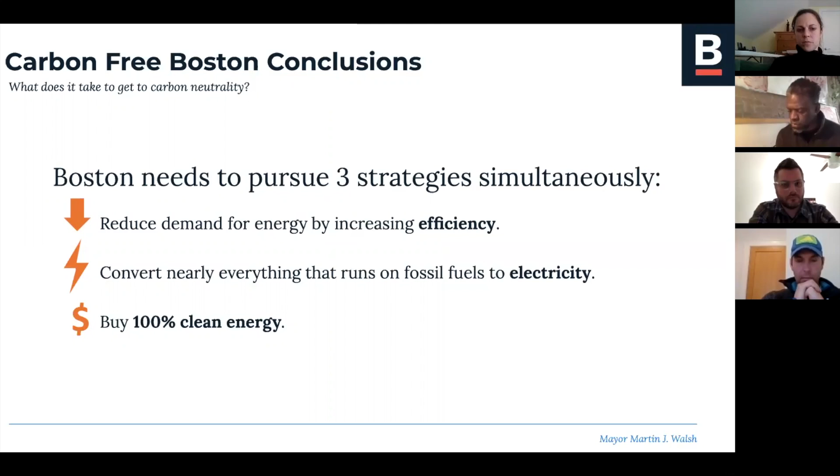And with that, they felt that any new building that's not net zero will be a building that will have to retrofit in the future.

So through the leadership of Chief and Director Sheila Dillon, we've been working with Placetailor and Thornton Tomasetti to study zero emissions in the buildings that we fund, and those are generally the typologies.

We have a diverse range of typologies we look at at DND. They're not all large buildings. They range from 1 to 2 family all the way up to multifamily buildings.

So we wanted to study best practices, outline optimal strategies, and then this work would lead to a set of requirements, guidelines for zero emitting buildings, or at least zero emitting ready buildings.

We did get some feedback from people recently that was very helpful. One clarification I wanted to make is we did ask the consultants to look at electricity as a fuel source based on the recommendations of our Energy and Environment Department and the Green Ribbon Commission. We know there are challenges to that for certain building types, but that was the goal of the study, just study one fuel type.

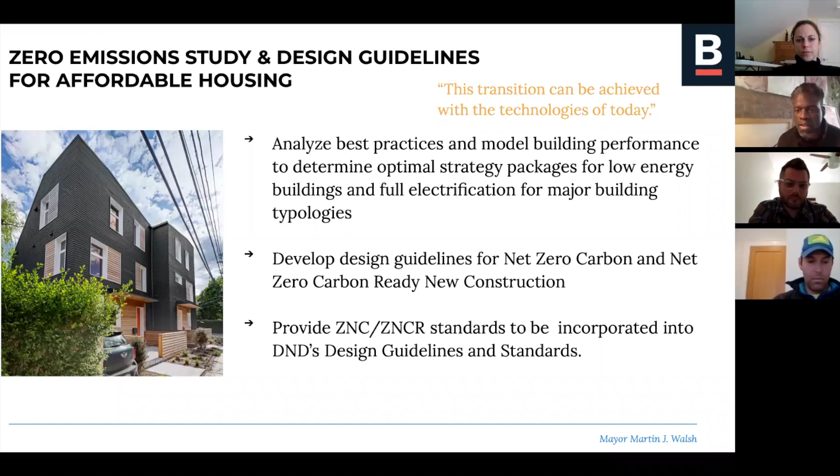Sure, and based on some feedback from the last stakeholder meeting, I think I talked too much, so I'm going to expedite this section. I'll review the methodology briefly. Feel free to ask questions, but I'll try to hit some highlights.

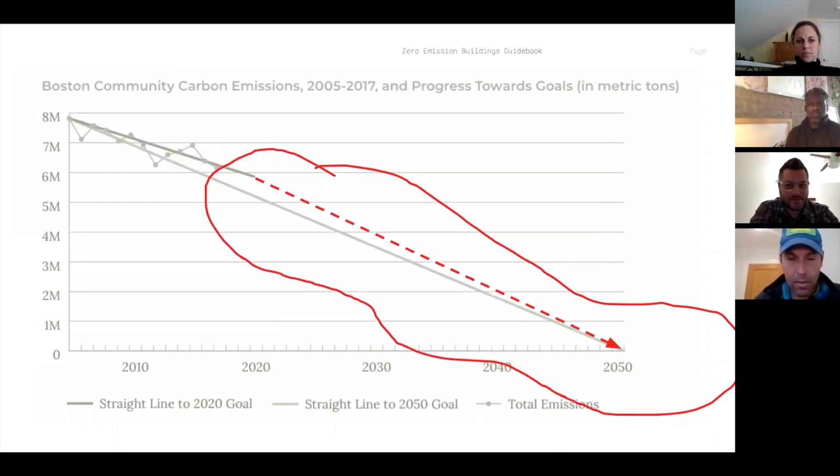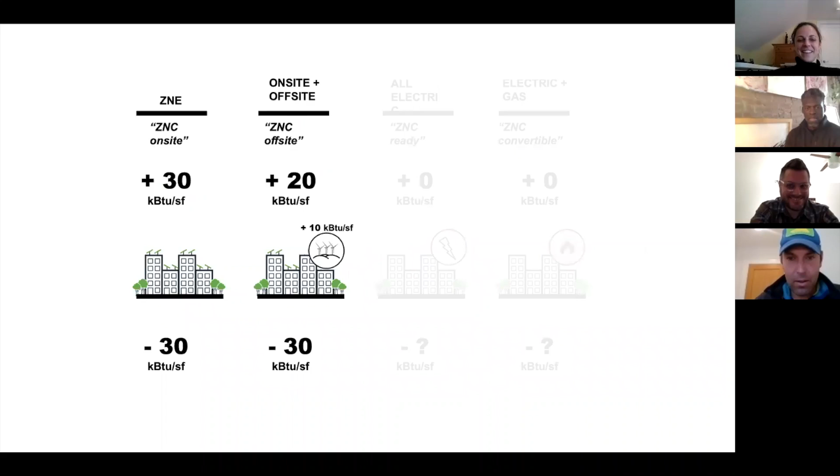Travis, can you skip forward a bunch of slides? Maybe I'll tell you when to stop. Keep going, keep going... almost there... a little further... okay, I hit a lot of stuff that's less critical. Yeah, we can start there. That's good, okay.

So what we originally set out to do with this project was figure out standards for zero carbon buildings. We started by looking at four individual building typologies, real buildings, actual energy models used on real projects. We asked: if you stuck a bunch of PV on these, could they be zero carbon? We concluded quickly that little buildings would provide an excess of clean energy, and tall buildings just couldn't get there.

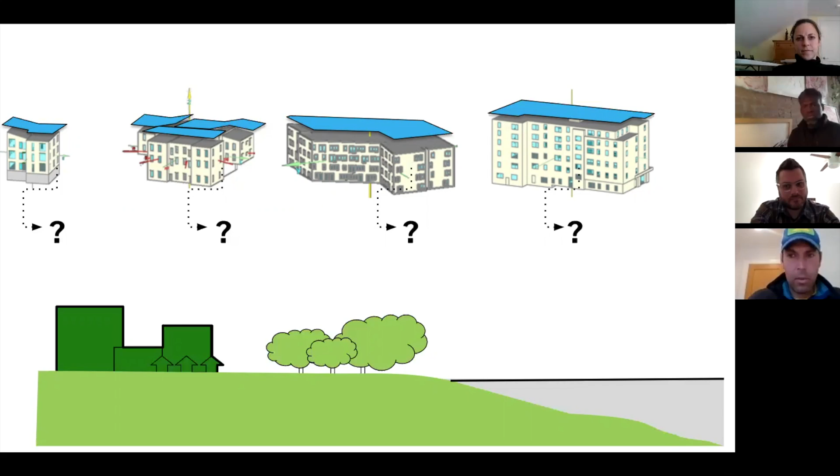Buildings in the middle, as you got bigger, the requirements became more and more stringent. This basically sums it up: if you have the same building with the same roof area, as you get taller and taller, you just can't hit zero carbon anymore.

So the result of trying to do this across different typologies is you put really intense standards on bigger buildings. The bigger the building, the more you need to drop the energy demand per square foot, which just isn't fair. It disincentivizes urbanization, it disincentivizes density. It's not an equitable approach.

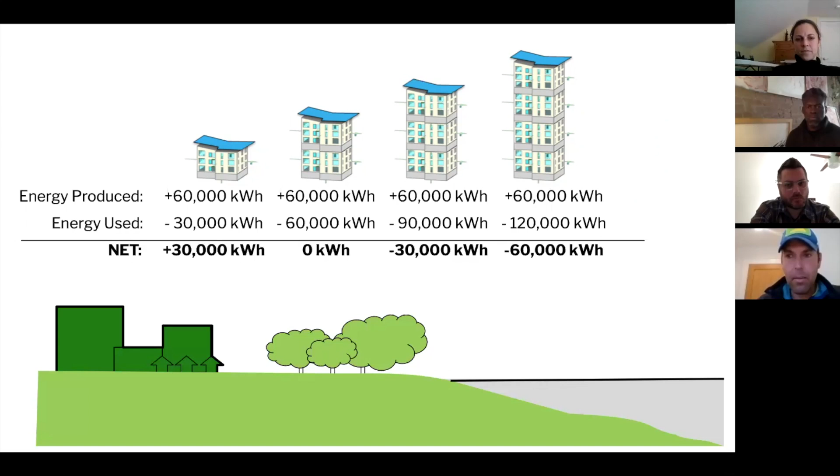So if you go to the next slide, yeah, that sums it up. Next slide.

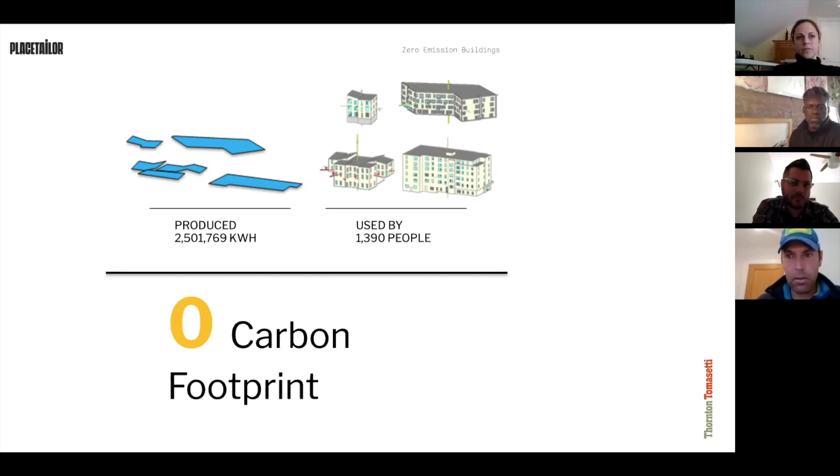What we came to was a per person metric. We took all of DND's upcoming portfolio and said, if there's a certain amount of renewables on all these rooftops, they could generate this many kilowatt hours. That becomes the budget to hit zero carbon across the portfolio. Now, if you take all the people that are going to live in those buildings and divide the total produced by the total amount of people, you have a budget of kilowatt hours per person, or in carbon terms, a carbon budget per person.

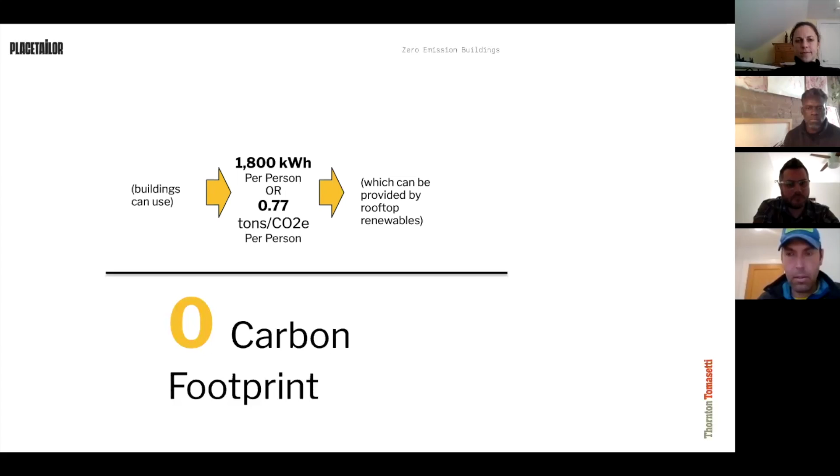Next slide. And so that's where we ended up: this idea of 0.77 tons of CO2 equivalent per person. This lines up almost identically with Passive House's carbon emissions targets. Passive House actually made the same decision of going to a per person metric so as to not disincentivize density. Next slide, there's the stuff from Passive House and the DOE study.

Next slide. But the question is, how do you get there? We set this standard of 0.77 tons of CO2 equivalent per person. How do you get there with each building? Next slide.

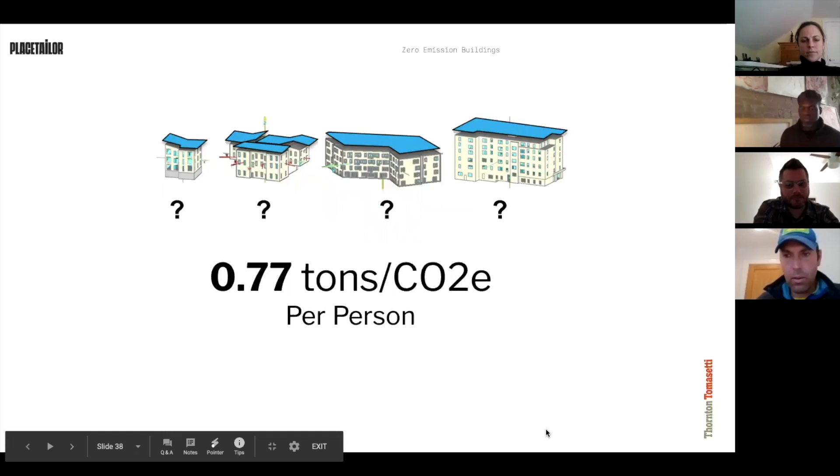So what we did was kind of a hack. We used four WUFI Passive models. Collectively we have a fair amount of Passive House experience, and we hacked into these models to get them each to run a ton of different wall U-values, window U-values, solar heat gain coefficients, all this stuff. That's what you see on the screen there.

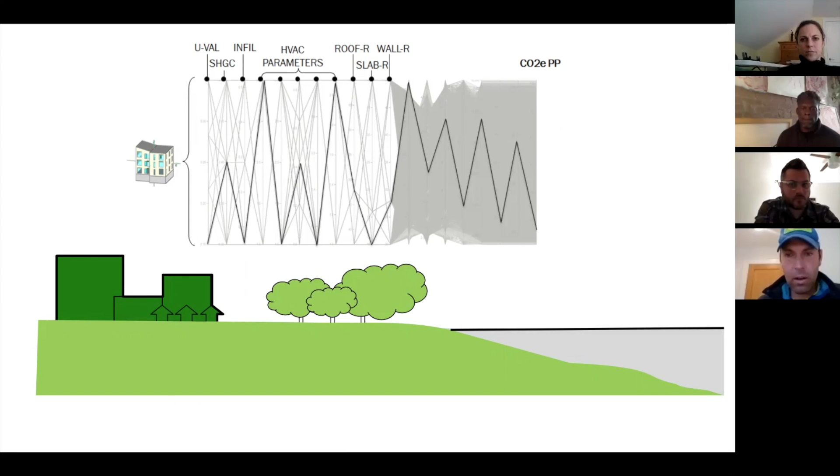Each one of those topologies gets about 80,000 simulations. So with those 80,000 simulations moving from left to right, you see all these inputs. It looks like a whole mess, but each one is a series of strings that goes from left to right, and ultimately, based on each combination, you get a CO2 footprint per person.

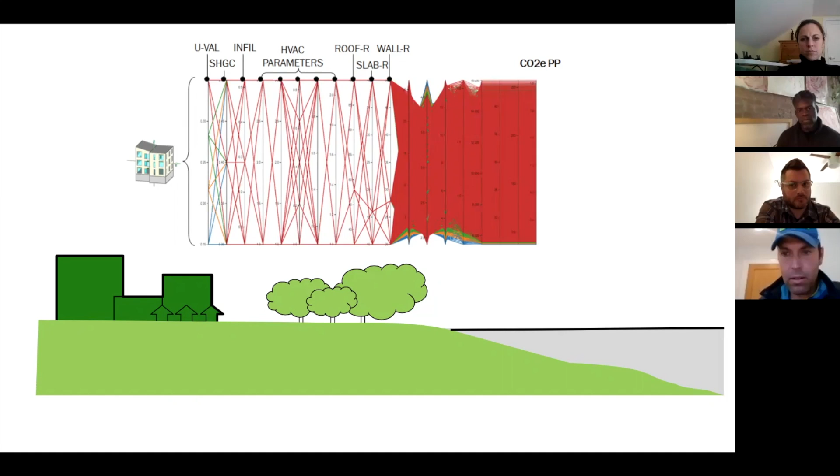Next slide. So what we did was take that bar and slide it down. We said, give me all the combinations that can hit 0.77 tons of CO2 per person. That gave us a formula of windows and walls and whatnot for each of those building topologies.

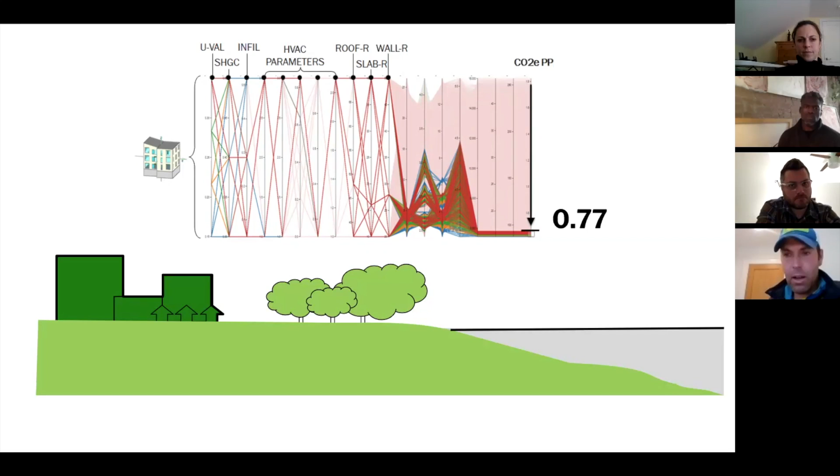And then Travis, who has a lot of building experience at Placetailor, figured out how to do it most cost efficiently, and we selected the most cost efficient recipes from those. Next slide.

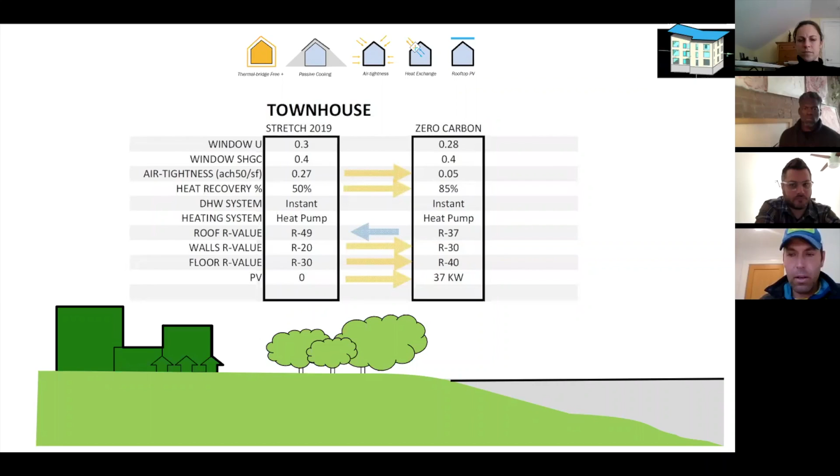And that's effectively what we've come up with in this study: prescriptive recipes for how to hit 0.77 tons of CO2 per person in these buildings, for different sizes, based on the most cost-effective way to do it. I'll let Travis get into that, but the idea is that it's a cost-neutral exercise. To quote my father on this one, the intention here is that this is an evolution, not a revolution.

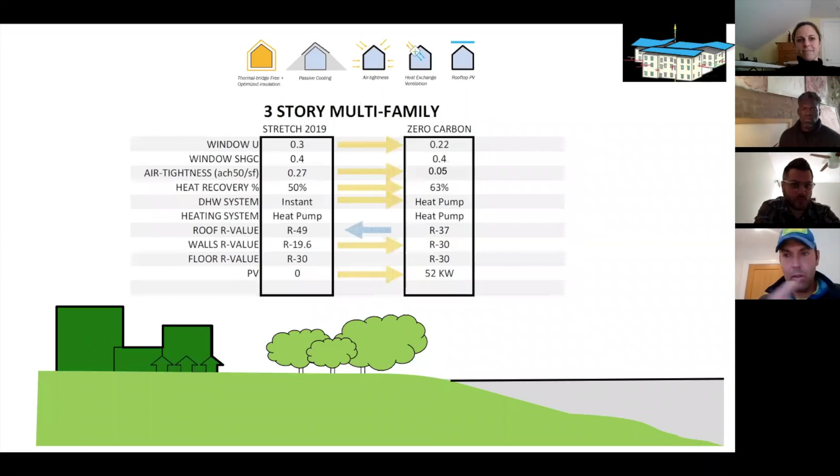When you see these shifts in the arrows from left to right, there's slightly more stringent inputs on different parameters. I think that's a lot of what we'd like feedback on today: how much more stringent these things are. The intention is that through this modeling exercise, we've created recipes so that if somebody's not doing an energy model, which most projects do not do, they can just follow this recipe and end up with a very, very energy efficient building, a very low operational carbon building.

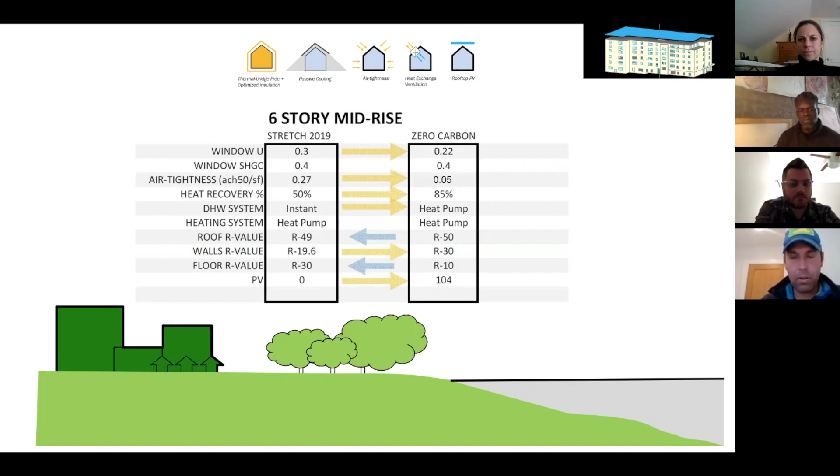So we did a bit of meta-analysis on it, like what sort of window to wall ratios are most cost effective, ventilation, and so on, to effectively get our formula.

I think that more or less sums up the methodology for how we arrived at these recipes. There was one question I wanted to address earlier about whether it was site or source energy we were considering. This is carbon emissions, so in effect it's neither. There's no such thing as site carbon emissions, unless you have a barbecue grill with smoke coming out of it — I suppose that's site carbon emissions, but ultimately all of this is considered from the source. We use state level multipliers for when you're using electricity at your building from the grid, so we understand what the associated emissions are. It's kind of like source energy, but specific to carbon dioxide emissions.

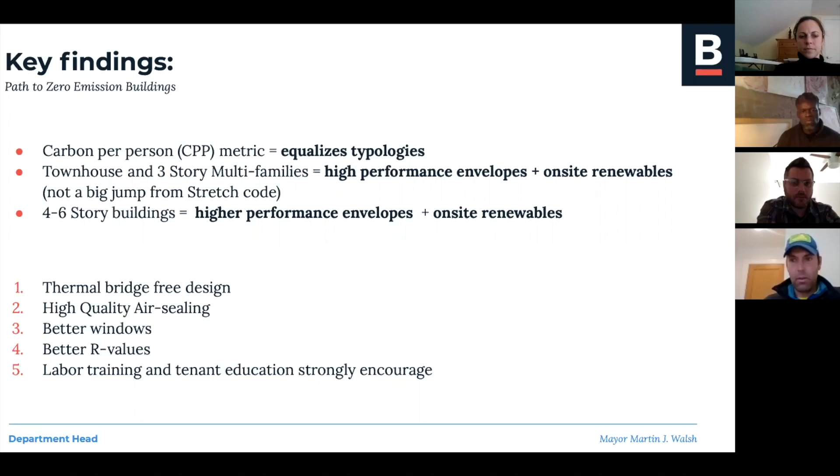Okay, hopefully that wasn't too brief, but it hopefully leaves enough room for questions if folks have them. Why don't we go into section 3 of the guidebook, and if anyone has questions based on the earlier section, we can jump back and forth as needed.

But really, we want the focus to be here on this section. Let's see here, hold on. We have a couple questions here. Should I hit them? Sure. Okay, it's scary reading the questions before — I've done it offline, let's do it online.

This is a big question: Why create a standard? Is this just reinventing the wheel? This is so similar to Passive House, but we're not using that term. Is this confusing to housing developers and designers?

Yeah, that's actually a really important one. Passive House is a performance-based standard — you create an energy model to demonstrate compliance. There's heating load, cooling load, heating demand, cooling demand, all these things that you need an energy model to produce. Passive House doesn't have a prescriptive standard. They don't have something where a Joe Builder can look at it and say, hey, this is how to get there. So that's effectively what we created. That's actually on Passive House's radar — there's talk of creating a prescriptive standard. The group's not there yet, but we're kind of advancing that.

The next question: 1,800 kilowatt hours per person per year goal — Passive House Plus is 3,840 kilowatt hours per person. Is this a future goal? I'm not sure what that means, but the emissions we're setting per person... we'll have to dive into that one. If you want to send me an email on that, that's fine. I want to hold off before I answer it.

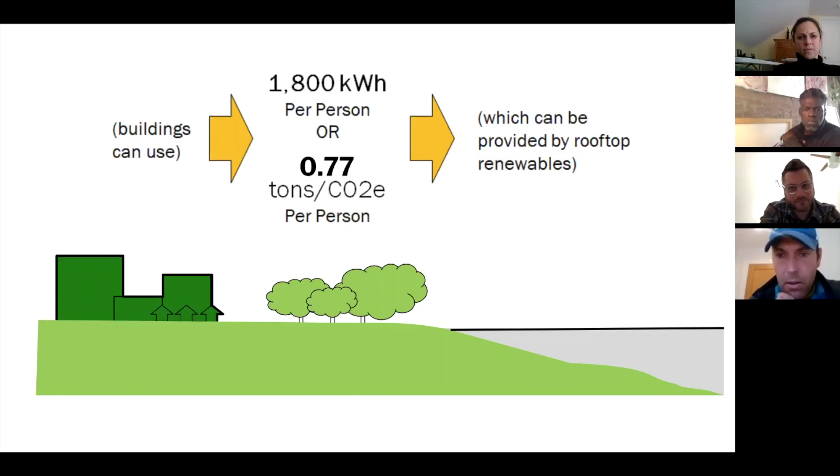Jay, we talked about that earlier. Yes, Article 37 still applies for buildings of a certain scale.

Why was solar not treated as an ECM similar to others? So all these numbers, the budget was based on a fixed amount of solar on the buildings, and then the energy use comes after that.

So you're saying, like, if a project wanted to increase the amount of solar production on its roof, would that be considered? That seems to be the only way that you would do that.

Again, this is the portfolio-wide approach. It's not a variable that you'd manipulate on a portfolio-wide approach. We kind of felt like we maxed it out on a portfolio to achieve zero carbon. The standards are the numerator on that.

Will you allow Passive House certification as an alternative pathway to prescriptive measures? We talked about that a bit too. A bit of this is still kind of getting resolved.

Wow, questions are coming in fast. That's good.

This is currently intended, primarily we're focusing on the smaller building typologies. We imagine there may be some more flexibility for the larger typologies, is my understanding. But it sounds like Passive House certification would likely show compliance with this. It would probably be consistent with it.

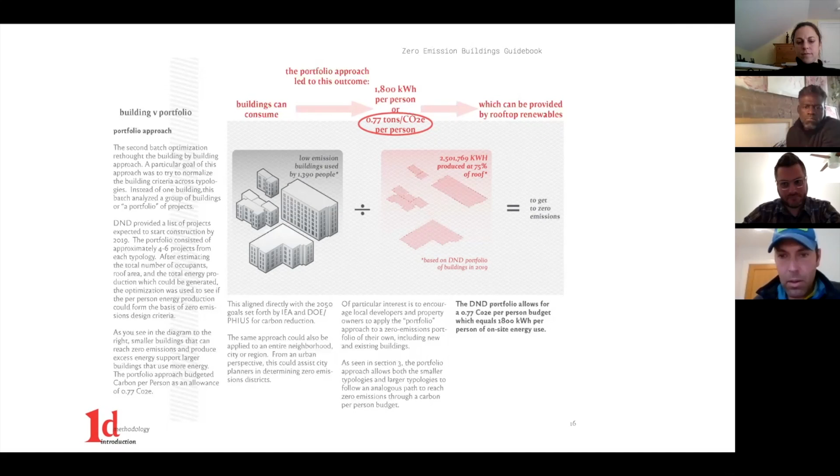Does 0.77 include plug loads? Yes, it does. It's hard to make electric domestic hot water work in a multifamily because gas is so cheap.

Yeah, we've had that question a few times. We've been able to show that there isn't an operational cost increase. If you use a heat pump, which we're recommending, you actually save money.

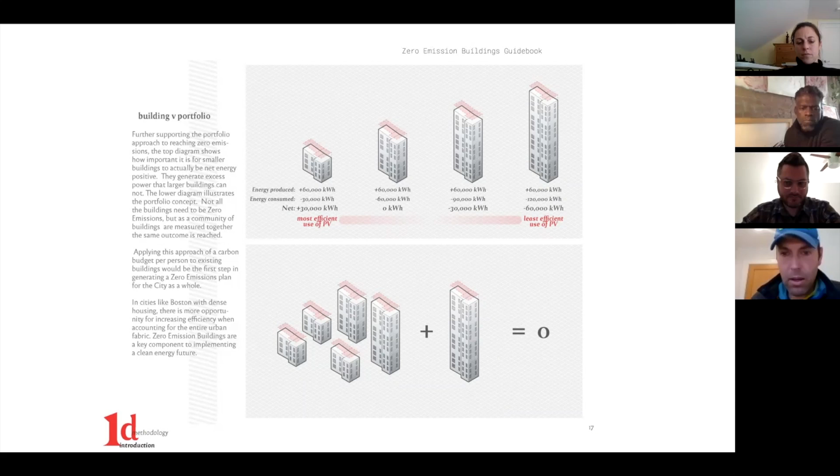Are the window wall ratios lower than what we see new buildings generally are in the market? Yes.

1800 is site, you should keep it. Please explain site versus source values from Passive House. Agreed. We're trying to move away from energy metrics here, just focus on carbon.

High-rise buildings can be made to be Passive House. I don't think you should discount energy efficient high-rises. Nope, not discounting them. This is a way for high-rises to achieve the same standard.

Stretch code and or Article 37 would require some form of energy modeling. No. Yeah, so again, once we get into the bigger building typologies, Article 37 would require some sort of energy modeling. I think we probably need to work a little bit on alignment with that. But either way, if you're following these standards, there would be no issue hitting that.

Hopefully this won't be a requirement since affordable housing can get QAP points, utility incentives funding. I'll defer to Jay on that one.

And the last one, your modeling summary does not show anything for cooling. Why not? In terms of cooling energy use, we should have some cooling energy use in there. The buildings had cooling. Yeah, we were considering the cooling as part of the heat pump.

Okay, I think I got through those. And again, oh crap, there's more. Excuse me. Yeah.

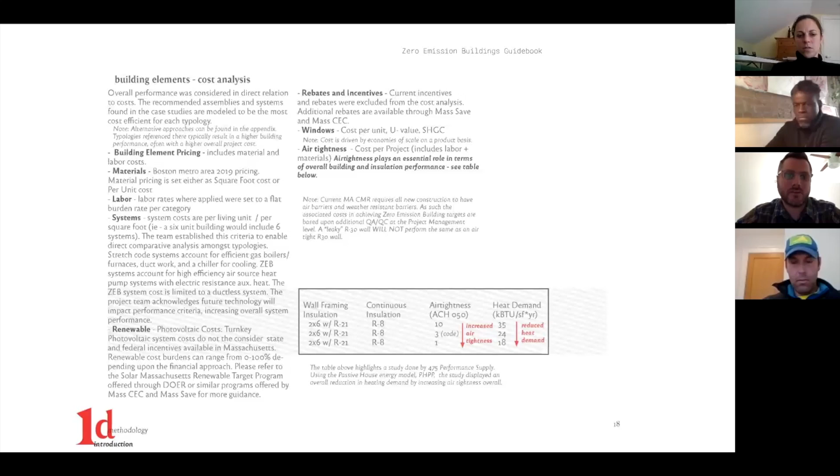So where we saw a major breakpoint was in the management level and training level. As building teams get more familiar with doing airtight buildings, this might even drive the cost parity down even further. So once middle management and QA/QC come up to speed with airtightness, we see this as a good indicator that the construction industry will move in a more effective manner to deliver these buildings.

So just to further break down what we analyzed, this all corresponds back to anything that we're going to recommend, and the recommendations breakdown in the summaries. So heat recovery ventilation, heating systems, overall wall values, roof values, floor values, and going back to the domestic hot water systems - there's been a lot of chatter around these as well in the high performance building world, just the shift to air source heat pumps.

We do recognize that this is an emerging technology here in the States. There are a lot of systems that have been proven in Europe and Japan for a number of years, and we're hoping those will come across the shores soon. We've also seen studies coming out of New York City showing larger multifamily buildings taking advantage of air source or water source heat pumps in a very effective manner. If people are looking for case studies on those, we can provide a resource guide in the back of this book to direct people in that direction.

We've seen some stuff coming out of Steven Winter in New York for some of the buildings that they're working on. And Colin probably has a little bit more input there as well - yeah, what he's been seeing too.

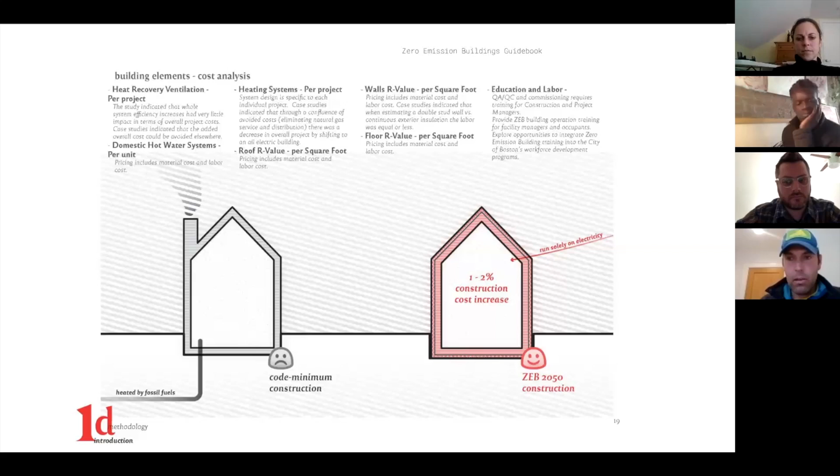We're seeing operationally the cost being quite competitive.

So after we summarize what building elements we did on a cost per basis, we tie the two together in terms of energy and cost and do a comparative chart looking at stretch code versus the zero emission building, and either the percent decrease overall in either direction or increase in terms of cost. I think it's important for people to take a closer look at this table. Maybe we want to hold here and answer some questions around it, but we want to make sure this comes across clear and address any questions people may have in terms of gleaning the right information out of it.

So I don't know, Colin, if you're seeing any questions specific to this one, but...

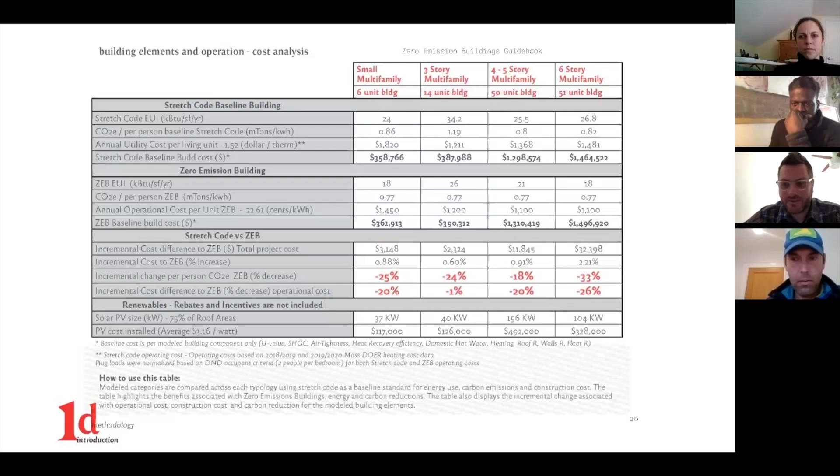Why does the unit count only go up by 1 in the 4 to 5 and 6 story? There's a chance it could be a typo, I don't have it fresh in my mind. But these are real buildings we were using, so it's not like we were normalizing the square footage per apartment. It wasn't in the scope of this to design a perfect multifamily so these sizes align identically. That would have been a really interesting exercise, but we were kind of using what we had, so that could also be part of it.

Section 3 are actual buildings.

Has the heat pump hot water 2.1 COP been approved in Mass? What's the cost change compared to gas? I'm not sure what you mean by has it been approved, I don't know how to answer that question. You can go to Home Depot and buy one of these things with a COP higher than 2.1 and put it in your house, and it is very much approved and also encouraged by the state. COP means coefficient of performance, the efficiency of it. So a 2.1 COP would be a 210% efficient unit, in case the acronym was misunderstood.

Hank has a question about the 6-story, 51 unit building. I can look into the typologies if that's helpful. It also might help to clarify that we left commercial space out of the modeling. So if it's potentially the 6-story, we'd have to go back and look at that building in particular, but maybe there was a story and a half of commercial space that we removed.

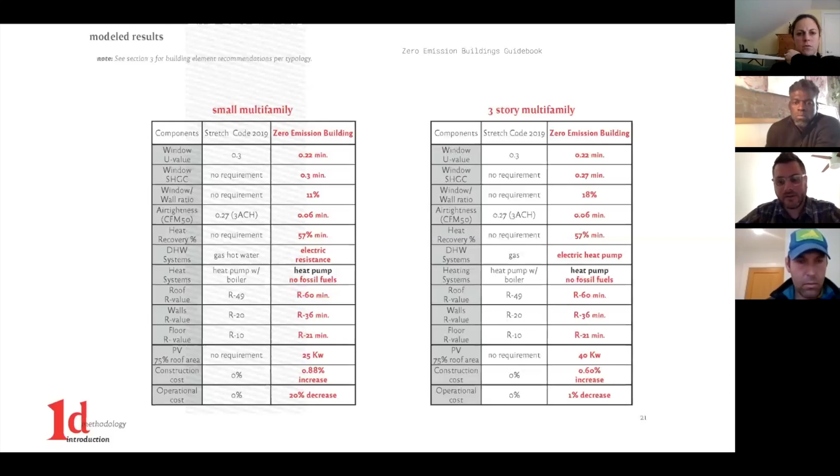So maybe I'll scroll down a little further and get into this part of best practices, going back to earlier comments — this is really to set the path for people that don't have access to energy modeling, that might be new to high performance buildings, and give that simple approach on how to get there. At Placetailor, we get those questions a lot from other builders and new developers. We function mostly in the private market, so this is something they're interested in, which is great to see the market moving in that direction. As far as affordable housing is concerned, there are other folks operating in that sphere at a smaller scale too, and it's important for them to gauge an understanding on how to get there. So this is setting up architecture 101 in terms of a zero emission building and the priorities we see it needs to take on.

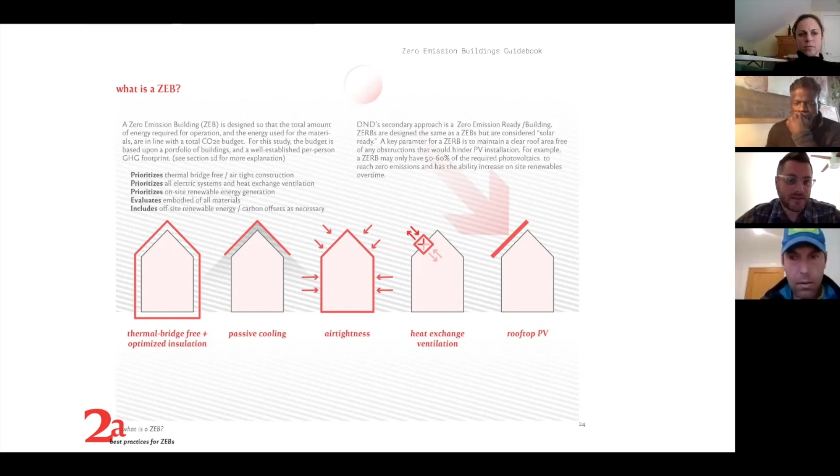So thermal bridge free construction, airtight, all electric with heat exchange ventilation, on-site renewable energy generation. We encourage evaluation of embodied carbon in all materials — we'll add some ways to access guidelines for embodied carbon in the resources. We can also direct people to the Carbon Leadership Forum and some free tools available there. This can include offsite renewable energy as necessary and carbon offsets as necessary, so if you can't get it with 75% roof area, you can go down that path as well. There's also a note about DND's secondary approach to a zero emission ready building — so that's another avenue DND is looking at, where it might not have the PV, but the potential is there.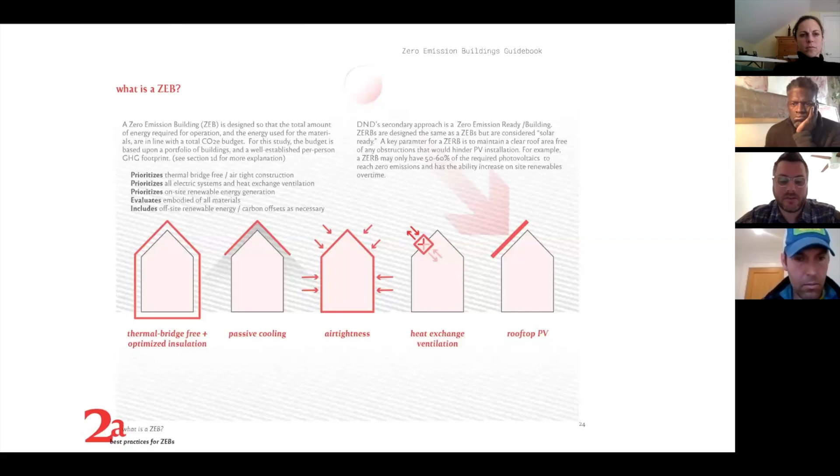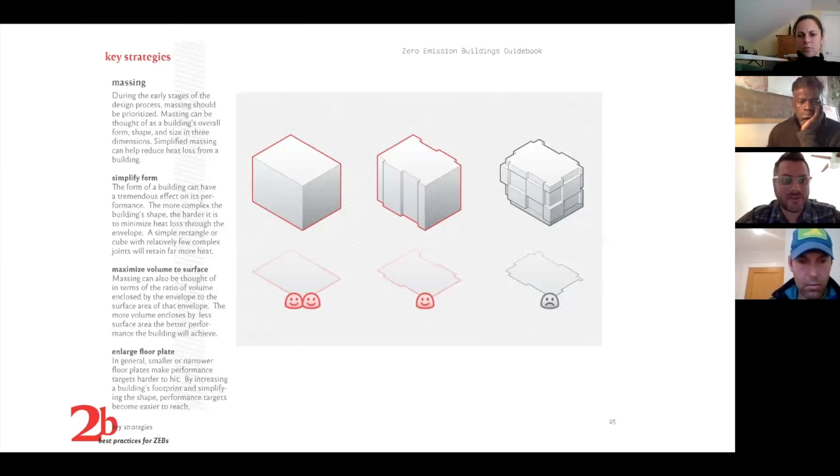So key strategies, again architecture 101: surface to volume ratio is what we're encouraging. The more push and pull, the harder it's going to get to achieve these. Also keep in mind that when we're looking at cost, we're looking at a simple zero emission building — the more complicated you get, you can get into structural systems that are more complex and more expensive. So we don't want these typologies to be singular, and we encourage architectural expression, but that's the challenge for the design teams. Architects enjoy having constraints, so working within a simplistic constraint could be a good thing. Orientation — we know these are urban infill.

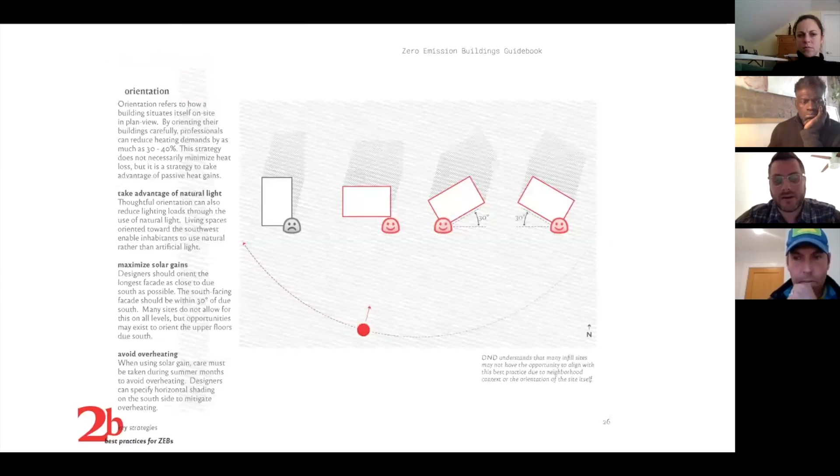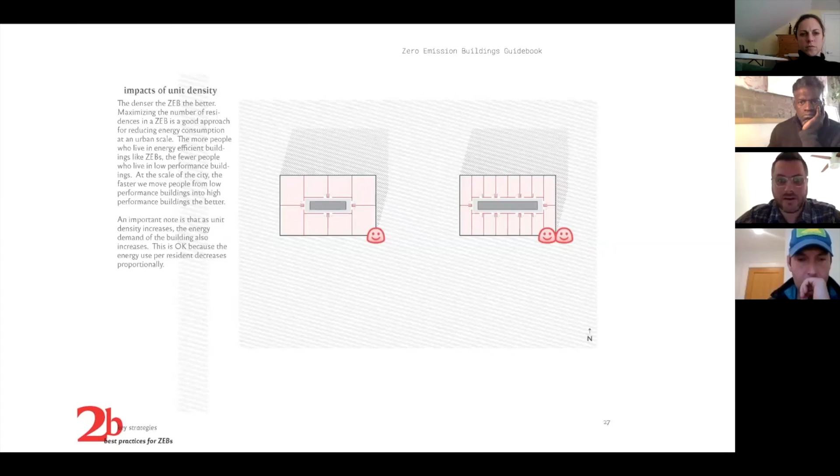So the typologies that we looked at might not have the optimal solar orientation, which is why we wanted to model real buildings. Going back to unit density, the carbon metric per person encourages density. We want to ensure that the urban fabric is fulfilled, and we see that the path towards a better carbon future is through densification in the urban centers.

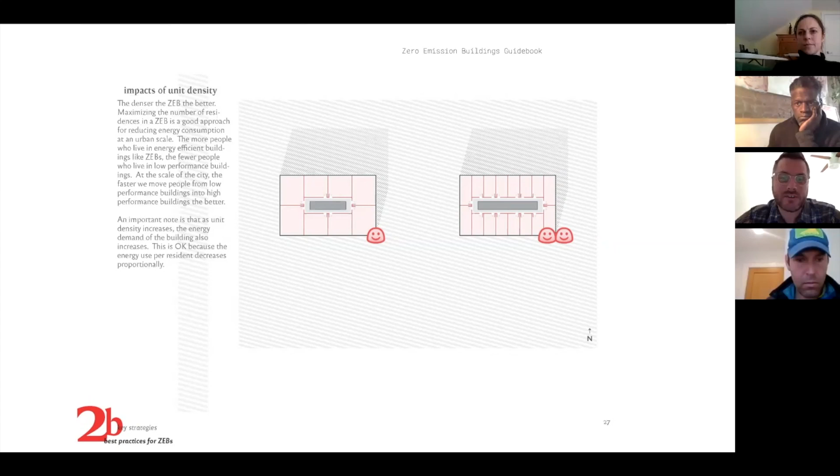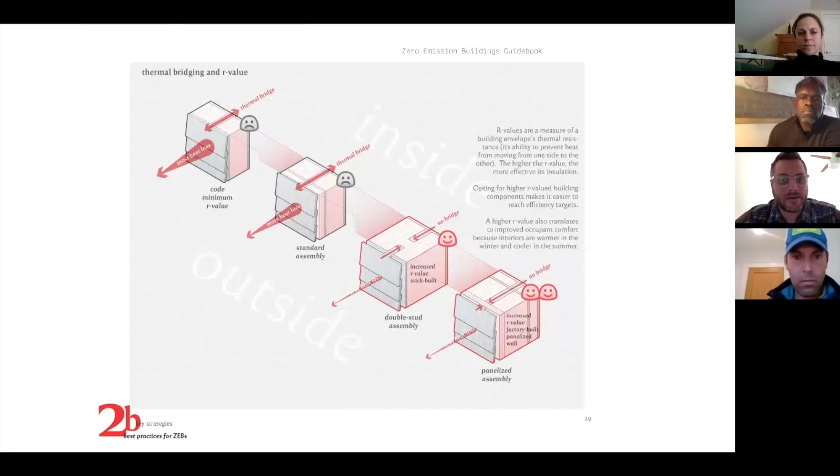Glazing percentages, again, we're looking at that 15 to 18, maybe 20% range of window to wall ratio. That's kind of your path to getting to a thermal bridge free assembly, and the best ways to achieve air tightness, following the red line principle. The more squiggly that red line gets, the more challenging the air sealing will become.

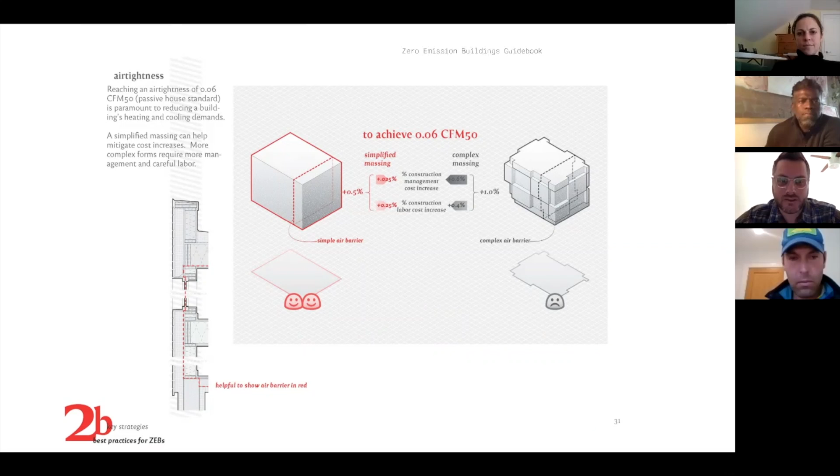And then a good balanced ventilation system with heat recovery. We want to encourage that as well, as indoor air quality is becoming even more important, especially with what we're all facing right now. There's been some early analysis on particulate matter and how that contributes to virus spread, which has been pretty interesting. So we can start using buildings as a means to help fight our current pandemic.

You were just talking about natural gas there, and there was a good comment that brought up, but I'm trying to figure out how to use these toggles to answer it. The question was: is the avoided infrastructure for natural gas factored into the cost of the all-electric building? Was there an avoided cost that we considered? Yeah, we did look at that as an avoided cost.

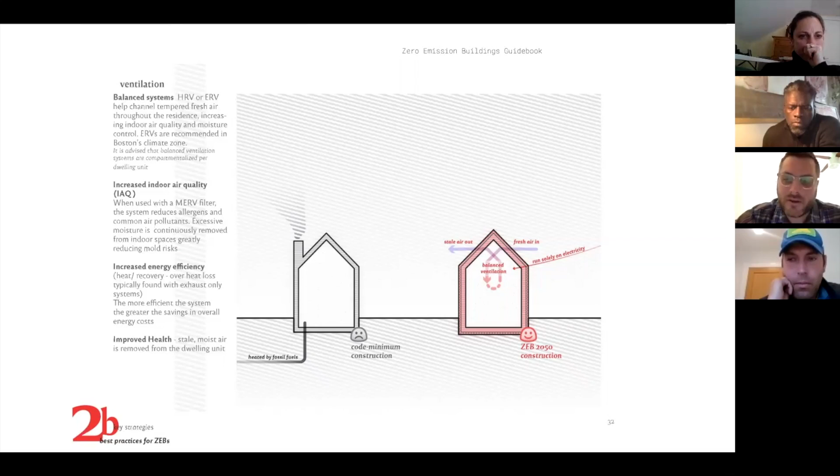So eliminating that street connection, especially in new construction—it's one less opening you have to do in the street, and one less utility you have to bring in.

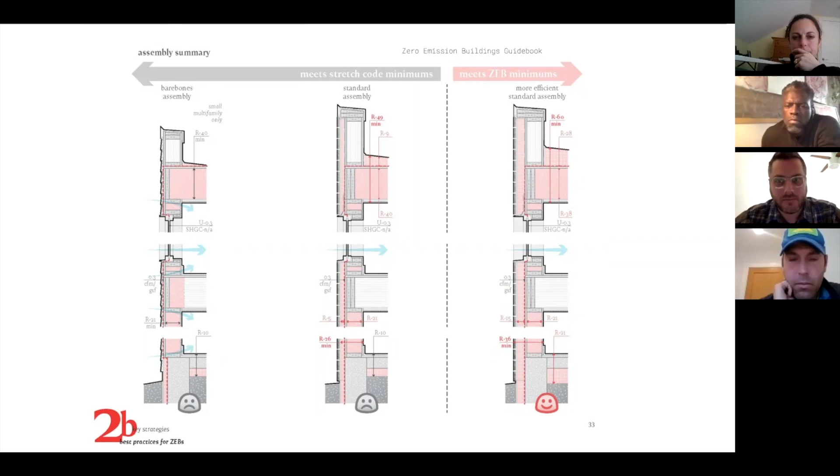And then just going back to the general zero emission assemblies and how to achieve that. As we've mentioned a few times, if people want to go beyond this as a methodology, as a means to have a better performing building, you certainly can do so. But these are minimums, so we just want to make sure it's accessible to people that may be a little scared of energy modeling or going down this path. The idea is to show that it is a simple way to go in terms of building construction.

And there was a good question, actually a construction question, that said what if some passive house analysis indicates that a different wall design is preferable? And I think that's very much so encouraged. The idea was, if somebody looks at this and sees an R30 wall and they fall off their chair, the idea is that this is a way that Placetailor found to build it cost effectively.

And I just said R30—I don't remember what we actually listed in there off the top of my head. But of course, it's a performance value, so it's the cumulative R value of the wall. You can make it out of mushrooms if you can show that it works.

Going back to the wall assemblies, we've found in the smaller typology, the double stud wall is a really good cost-effective way to go. It's easy for stick framers to get their head around—they're just framing the building twice. There's a lot of debate in the world about worries about condensation and permeability, but as long as you have the right vapor barriers to the inside, you feel like you'll be okay in the smaller typologies. And certainly in the larger typologies, you can look at how to achieve the overall wall value. That R value in the wall probably wouldn't be through a double stud, but there are certainly more cost efficient ways to get there.

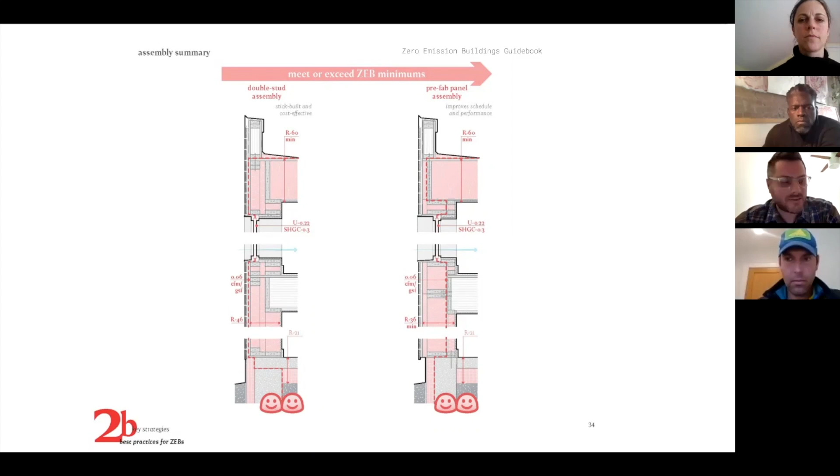And then just one quick point for reference: there's a new article out in Fine Homebuilding for the smaller builders out there about the effectiveness of double stud walls and how cost efficient they are. So it's some nice reading during the quarantine if you feel like it.

While we're on the topic of walls, a question was brought up that minimums of R36 to R46 walls will often produce overheating in passive house buildings. I don't agree with that. I do agree that overheating in very tight, high performance buildings is an issue—it has been, especially since the rise of passive house for a while. We're finding that the window properties have more of an influence on overheating, and the size of windows have more of an influence on overheating than do the R value of the walls.

If you think about a multifamily building, each unit only has effectively one exterior wall, so you're looking at a relatively low percentage of overall envelope exposure. The R value of the wall, especially in cooling season, has very little impact on cooling. R value of walls mainly affects the heating period. When it's 0 degrees out and you're trying to maintain 70 degrees inside, you've got a 70 degree delta T. When it's 80 degrees outside and 70 inside, you have a 10 degree delta T. The insulation in our walls is dealing with that delta T, that's the only thing it sees. It's not seeing solar gains and stuff like that. So the actual insulation value of the walls won't affect cooling as much as your window properties do.

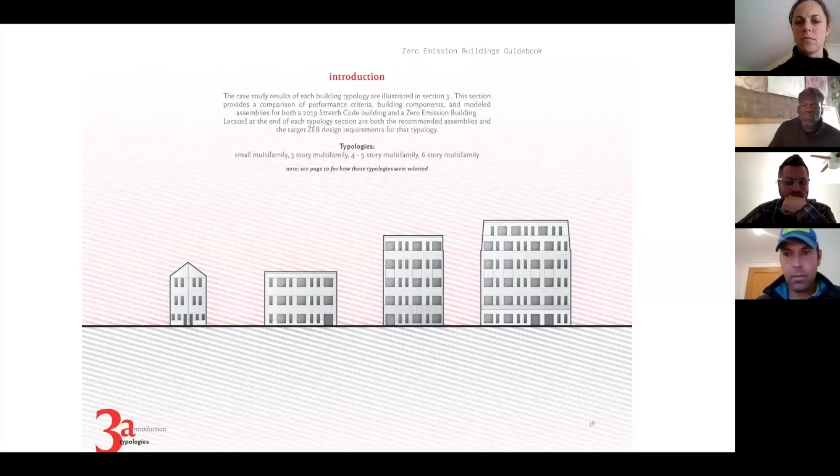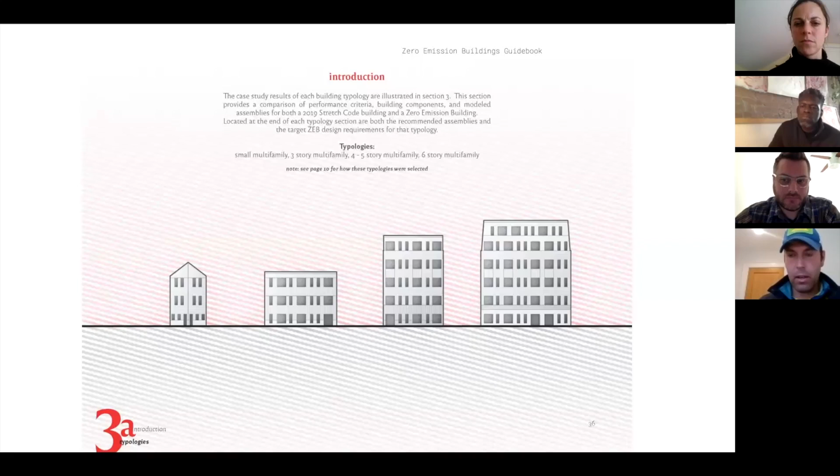A high solar heat gain glass, which was historically a problem with passive houses, creates these solar cookers - it's like old school solar design. We're very aware of that issue. We're consciously limiting solar heat gain coefficient on windows and minimizing window to wall ratio to try to reduce the potential for overheating, also encouraging operable windows. Well, encouraging it, it's required, but anyways, I just wanted to hit that one quickly.

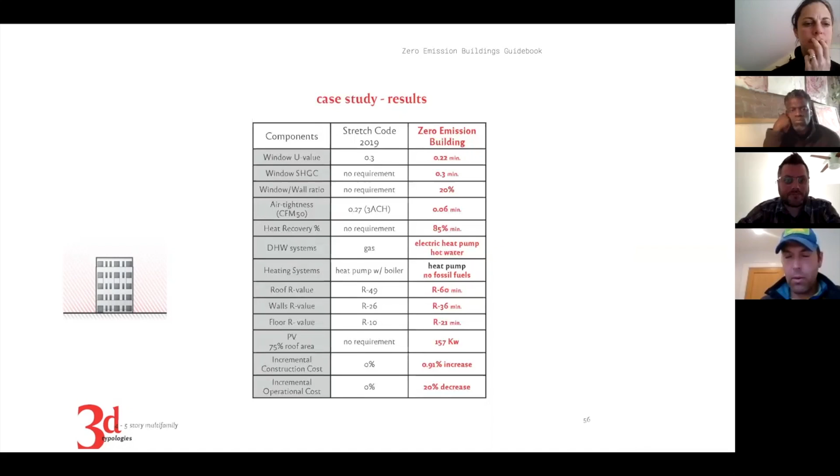And then there's a question about emergency power, which is a very relevant question. Happens on every all electric building. We are not saying you need to do battery storage for these projects. Emergency power may need to be fossil fuel based. The reality is when power goes out, we need reliable backup solutions. We haven't created requirements about that yet, but based on a lot of the quote unquote decarbonized buildings we've worked on, many of them have still included fossil fuel emergency power for very practical purposes.

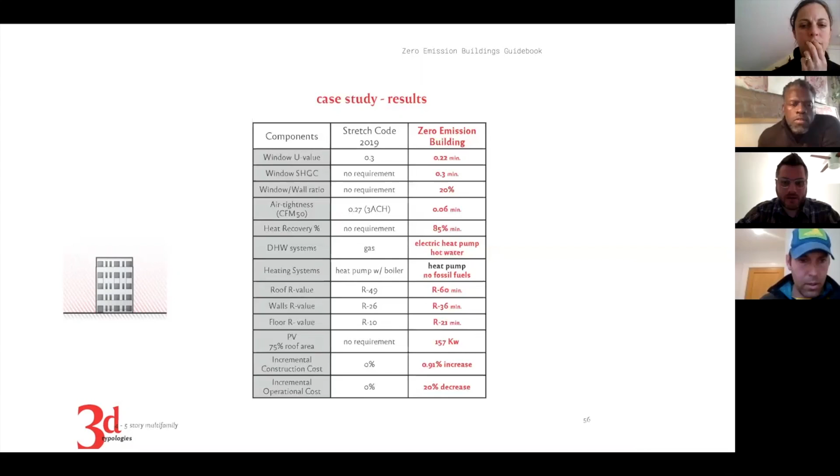I think it's important as we look at the modeled assemblies here. Since we were looking at real live buildings, everything that was modeled in the background was actual product that's available on market today. We withheld the manufacturer information, but we do want to point out that these are real assemblies, windows, heating systems. So that's something we can figure out how to represent in the resources in the back that'll end up in the appendix in the book.

Also in the energy modeling, as Colin mentioned, when we did the parametric analysis, we were sitting there scrutinizing the outputs pretty significantly in terms of what a comfortable building would be. We certainly could have made these buildings very uncomfortable for the occupants if we weren't considering solar heat gain coefficients and the window to wall ratios like Colin was saying. It was important to us that these were occupiable and comfortable buildings too, so that's what this criteria is also looking at.

So again, I'm just going through one of the real life case studies here, so of what the modeled assemblies actually were. This is looking at the massing, and it kind of relates back to the initial best practice study. Again, you can see it's a pretty simple building.

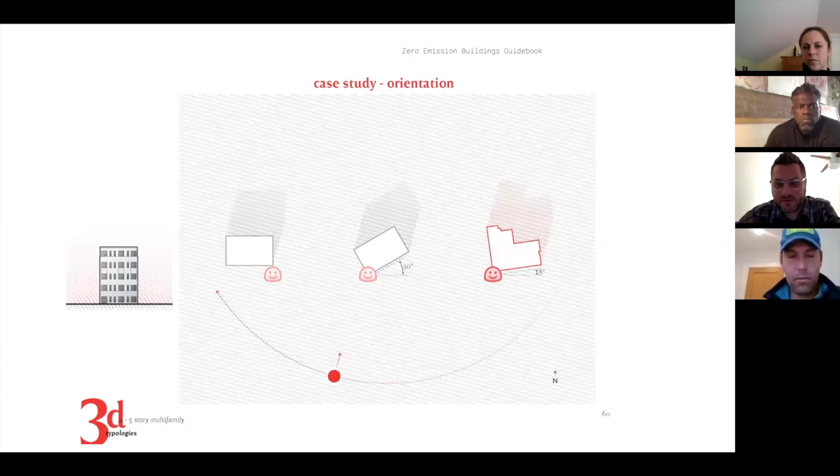There's a question here that kind of addressed what you're talking about. It asks, did you test these for future climate conditions? Which is an excellent question.

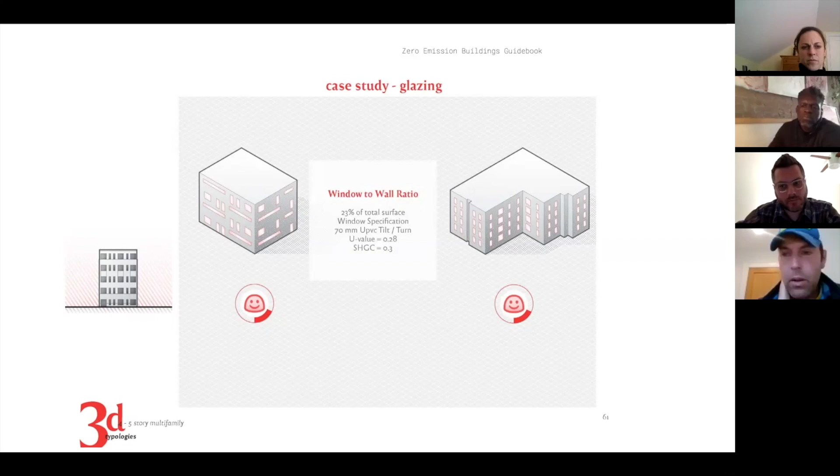When we look ahead to 2050 and 2080 weather files, we have some fun with the WeatherGen tool, which is really cool. It tells you what to expect based on predicted temperature rises. We're seeing about a 3 to 4 degree rise in the next 30 years, and another 3 to 4 degree rise in the next 60 years. We did not test those future conditions.

That 3 degree rise will also be coupled with increased heat waves, which will stress all buildings, not just these ones, and that wasn't part of this particular study.

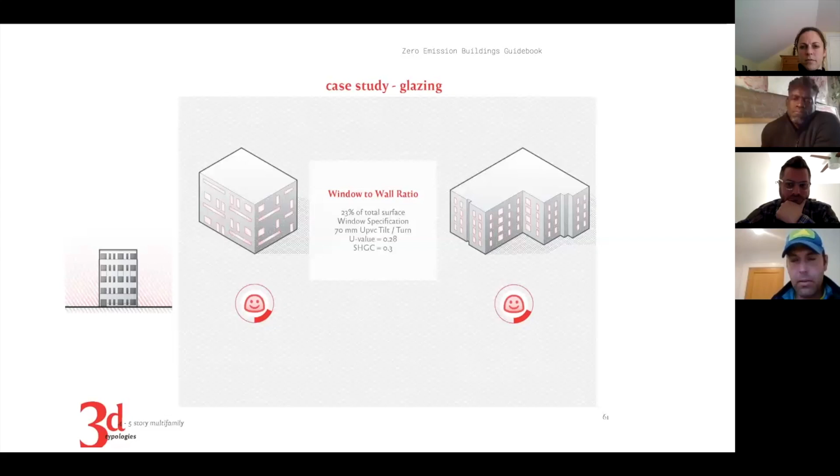I know somebody at Berkeley looking into how to model those future heat waves. It's a really interesting study, but also very difficult because you're not looking at trends, you're looking at anomalies. Making a resilient building for heat waves is certainly an interesting consideration. We are including mechanical cooling in these projects, which if we were going for a naturally ventilated building I think would be more of a concern, but that isn't to diminish those concerns. I think it's relevant.

So maybe here we can keep peeling through the Q&A. Sorry, we're jumping around quite a bit, but we're trying to address as many comments as we can. We have about 5 minutes left, so maybe if there's anything we want to reference back to, we could tackle a couple questions in regards to that.

Travis? Yep, it's Jay. Before we were starting this seminar we were chatting, and I think Colin, we were talking to your dad. You were saying this is sort of more like evolution, not revolution. So we're trying to improve practice through the guidelines and requirements we're creating at DDC.

I really do appreciate all the feedback. Our goal is not to take over the industry in any way or plant passive house or anything. We have a lot of buildings that don't do any energy efficiency at all, much less think about carbon emissions or the environment. So this goal is aligned with the mayor's vision of the city being carbon neutral by 2050. I think we're all on the same page about climate change and improving the environment, and that's the spirit in which these guidelines and requirements are intended.

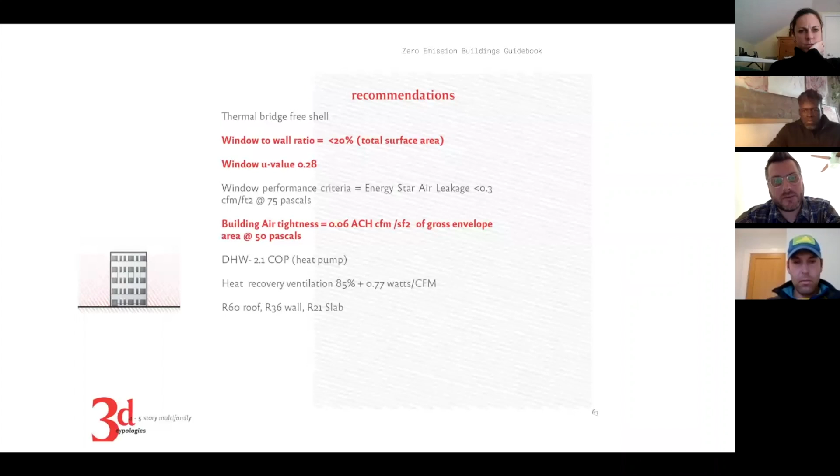Air tightness being one, window U-value being another. And going back to the window-to-wall ratio, we saw those three as major criteria. Not that the others shouldn't be followed, but we saw this as an easier path to reach the zero emission standard.

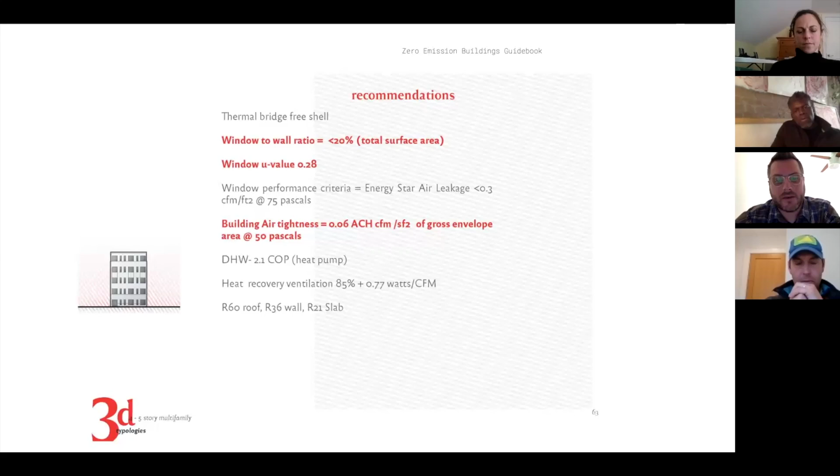Finding and sourcing heat pumps will come down to working with your MEP, or if you're doing design build, your mechanical contractor. And then window, roof, wall, and floor R-values - as Colin mentioned, those can be achieved in a multitude of ways, so what we were trying to highlight were key assemblies.

You could take these wall sections and implement them to hit the effective wall, roof, and floor R-values appropriately, and also show how you can trace that red air barrier line, making the connection from foundation up to roof appropriately and effectively.

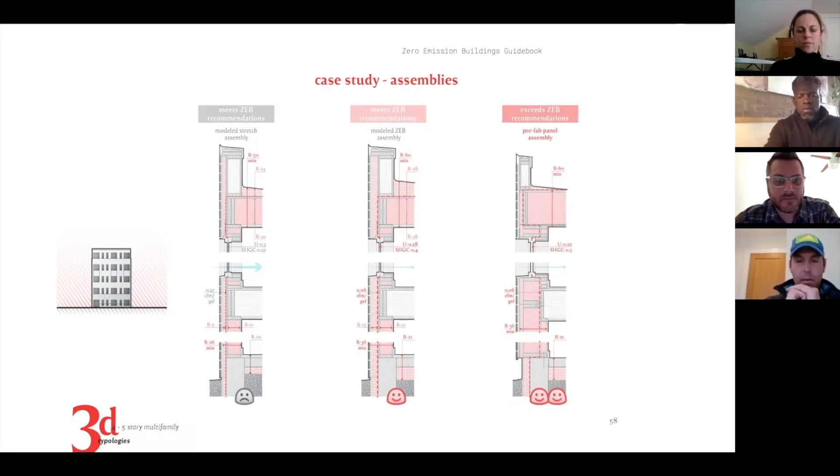So as you go through the booklet, anytime you see anything bold or brought forward in red, that means we're seeing it as an important feature to the building typologies. Colin, I think we might have lost your audio.

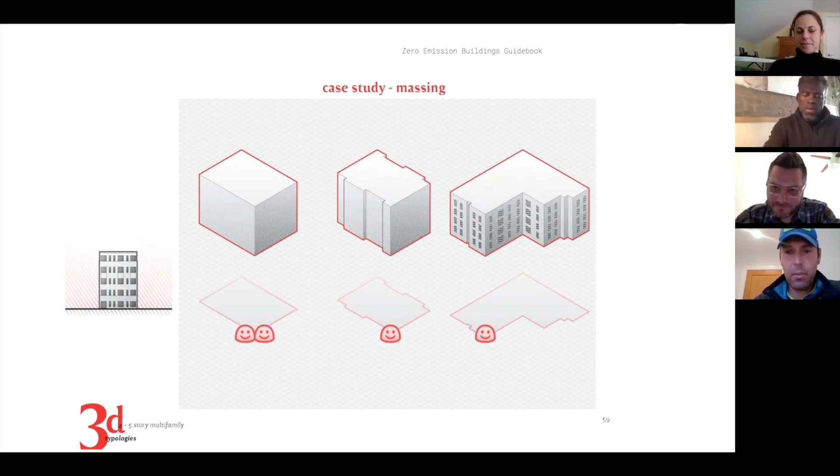Oh, shoot. Yeah, that was my fault. Sorry, I'm on my 10,000th Zoom, as most people are, and I feel like I should have the hang of it by now. So apologies.

One piece of helpful feedback for practitioners: what are the requirements that would make you fall off your chair? This is supposed to be interactive, and we're taking notes. From a practicality standpoint, electric domestic hot water was a big one people flagged, especially in larger buildings. That's an equipment issue we need to get our heads around. I'm less concerned about operational costs since the numbers don't suggest a huge operational penalty. That seems to be a big one.

There were some comments about overheating that are worthy of addressing. I think that's true for all passive buildings, so that should be considered.

I'm surprised there weren't more comments about the ability to achieve the level of air tightness we have there. To me, that's one of the bigger flags. I think the industry can get there relatively easily, but from contractor experience, we don't have a giant workforce familiar with airtight building. It's not a huge stretch to get there, but currently, at least, I'm not seeing it, other than some folks who really know what they're doing.

Long story short, if you guys want to submit the 'fall off your chair' items, that's really helpful for us to boil down and make these as practical as possible. Yeah, that's a good point.

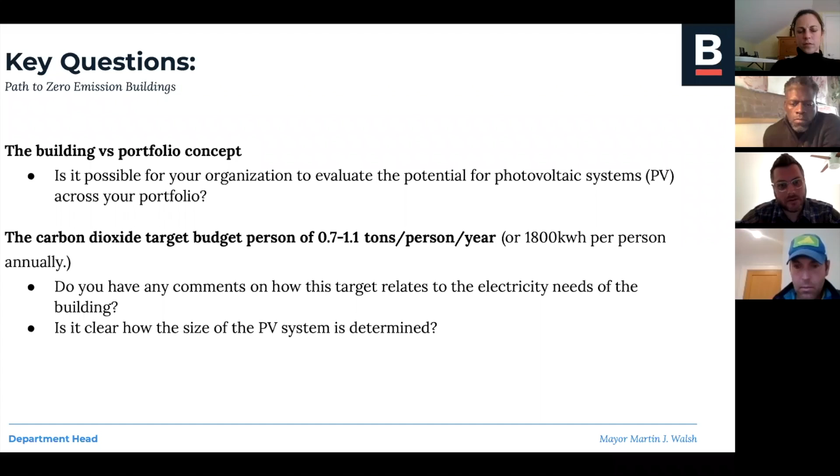Here we're highlighting a couple of questions back to our audience. We'll share the slide deck, but you can take a screenshot and put it in the Q&A here, or respond now, or go back to the feedback session on DND's website and enter an answer there, making sure everything's coming across clearly in the guidebook.

I also want to make sure there's going to be a difference between this study and the guidebook versus what we ultimately have for requirements, the DND requirements. There'll be a separate document we put out that actually defines what we'll use for requirements. So to Travis and Colin's point, if you can focus on the things that are 'fall off your chair,' we already heard that for larger buildings, domestic water heating will be challenging. There are some things we're in agreement with from the comments made in the Q&A.

I also want people to think about the fact that the building code and stretch code are going to increase even as we're speaking. Some of the things shown, especially in the wall assembly and floor and ceiling assembly, are going to get higher or more stringent automatically. So if you can, focus on things we want to nail down, especially the air tightness Colin just talked about, how to actually achieve that in construction. If there needs to be inspection, things like that, any insight you have from existing projects would be helpful as we start to make actual requirements.